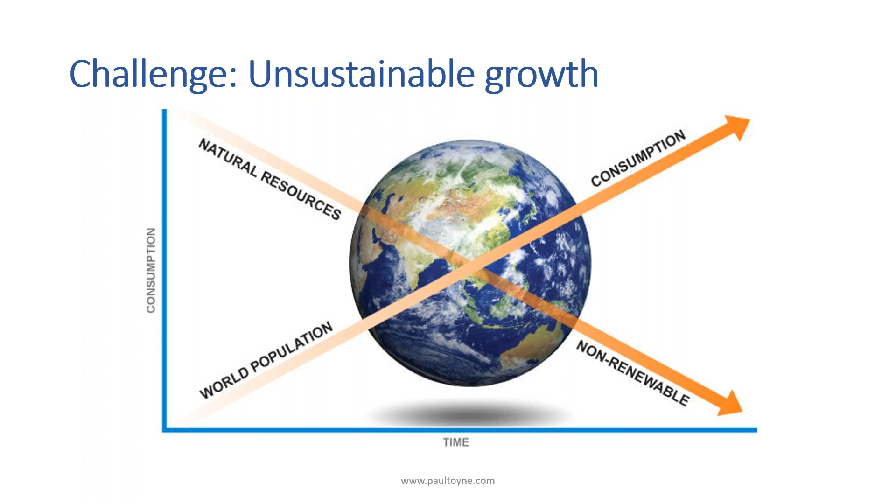I'll explain those different business models and then hand over to Julia. You've probably seen a slide like this before, and it really just puts into context what have we got: population growth, consumption increases, whilst finite resources reduce, and this creates problems.

It also creates opportunities. Most of you are built environment professionals, and you're well aware of this phenomenon of urbanization. It's not just happening in developing countries, but also in the UK, where we've got a growing population. We have to improve our infrastructure and increase housing, and we're creating new garden towns, for example. So we have to provide a new system to cope with these particular pressures.

When we look at population levels, we also have to understand how the biosphere has changed, and land use patterns and changes do affect the circular economy. I'll be referring back to that in a moment. But no surprises, you're probably all very familiar with the reduction of rainforests, the increase in desertification. All of these things are driven by our desire for consumption, which is stimulated by population growth.

If you're not aware of some of these publications, the first one I've got here is about biocapacity and our ecological footprint. People are now the major planetary force for change. If you just think about it, around 60 years ago, our global population was 3 billion. Look what it is now.

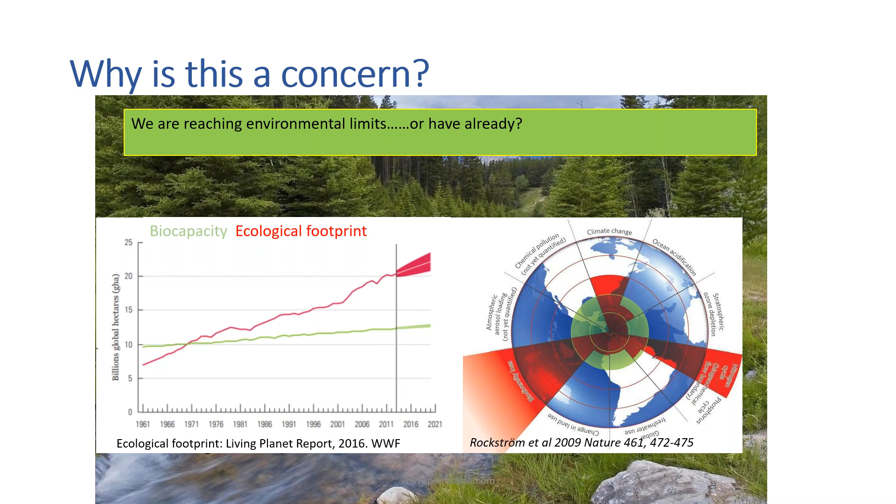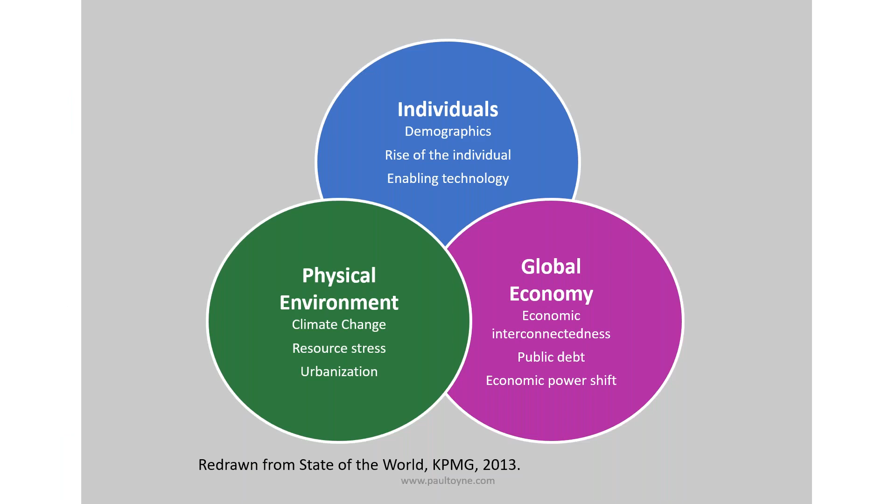So in summary, we've got an issue where we're going to need more environmental resources to satisfy the needs of more people. We need to distribute those environmental resources more equitably in a changing environment. We have land use changing. We've got the impacts of climate change. And indeed, when we start looking at these global drivers and trends, we see resource stress in the physical environment as being one particular challenge or driver that we've got to overcome.

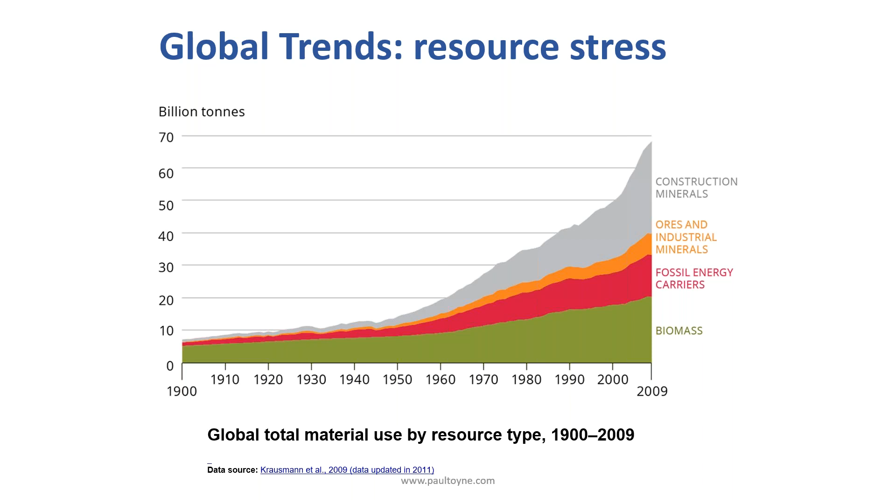And it affects construction. If you look at the data in this graph, no surprises, to satisfy developments, creating new towns, cities, building railways, airports, all the things that modern life involves, needs greater construction materials. So our use of construction materials is increasing. But we don't always have control over the supply chains of important materials relevant to us in the built environment.

Gallium, it's used in electronics for things like microwave circuits, for LED lighting, for diode lasers. Could we live in a world where suddenly there's no gallium for LED, when we're driving all these energy efficiency programs around LED, for example?

If you look at some of these other rare earth metals, they're incredibly important for technologies including advanced transportation, healthcare, scanners, and such like. So the point I'm making here is we've got resource use pressures, but we've also got very important materials that we've built up a need for in terms of providing solutions.

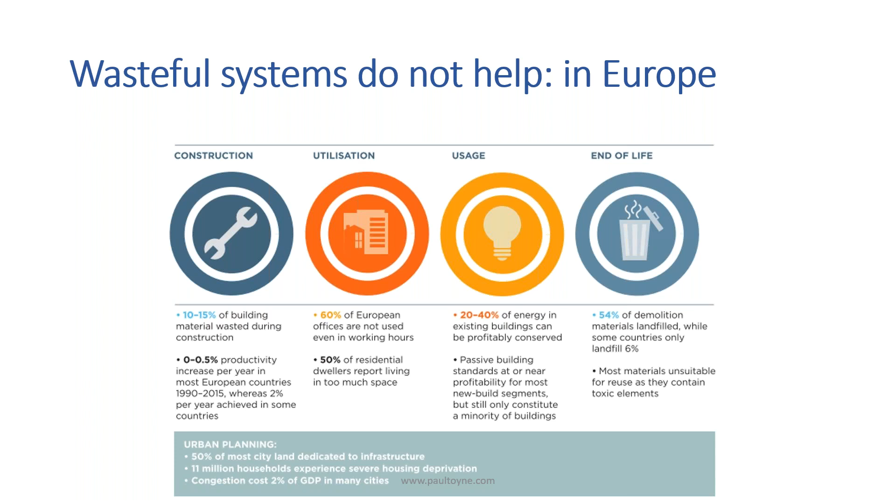Usage is around energy efficiency, and we've probably touched on that already. So there are opportunities within our system to improve how we design and build for the future, and how we think about disposal and end of life. So how do we transform what we've got?

The current system is described here, which is one of take, make, and dispose. We extract different materials, put them together, make something, then utilize it, but in that manufacture there's waste. And when we've utilized it, the consumers or clients, we typically waste it, we throw it away. It's not used again; we just go back and use virgin material to go through that cycle again.

And that cycle actually is a linear cycle. It's not circular at all. And that's the issue. So what does the circular economy attempt to do?

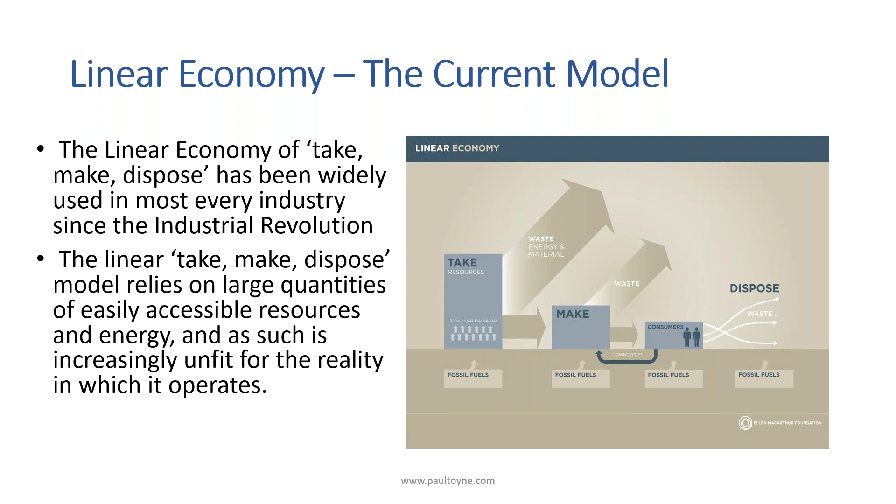So the circular economy is the principle, really: nothing is wasted. Everything can be reused, remanufactured, recycled, or put back into a productive cycle. The circular economy is meant to be restorative by design and aims to maximize and utilize the value of those materials at all times. That's quite an important point to make - you utilize and maximize the value at all times.

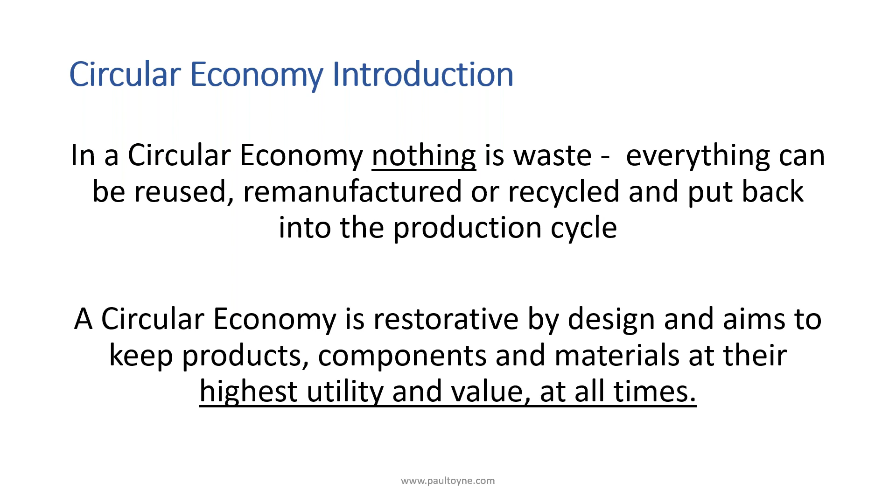You'll probably be aware of some examples where we attempt to keep materials in play, but we don't always maximize the value. So it's not necessarily the best use of those particular materials, but at least we're not completely wasting it and taking it to landfill.

That's the concept. A couple of other key points to think about: it's an economic model, and what it tries to do is decouple economic growth and development from the consumption of finite resources. In the same way we're trying to decouple climate change or greenhouse gas emissions from economic development, this plays a part in that larger equation.

It's also important to note it distinguishes between and separates technical and biological materials. In our presentation today, I think with Julia's examples, most of what we're going to be talking about is around the technical aspects rather than the biological.

It also focuses on effective design. When you look at it holistically, the way we design our systems and how we design for manufacture, for reuse, for disassembly, etc. - design is a fundamental principle that runs all the way through this.

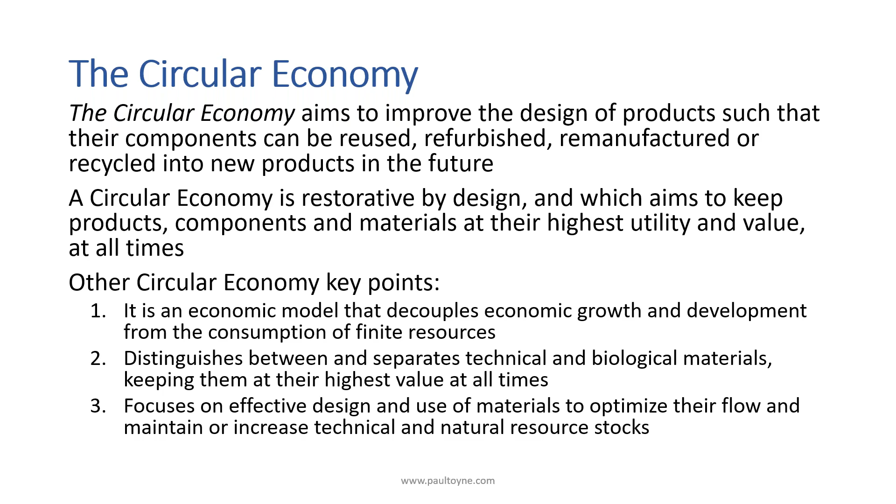So very simply, if we take a simple supply chain, maybe the production and pouring of concrete, we'd start with some basic ingredients, such as aggregates that come from a quarry, which have to be excavated. Those ingredients would then go to a product manufacturer. But before that, we have to make Portland cement, so we'd have a cement kiln including sand, silicas and various other things to make the Portland cement.

We'd then be in a situation where the cement provider or concrete pourer would be on site doing their mixes, which would include the sand, water, and cement powder, and then that goes into the finished product. And then typically, what would happen after that product has been used?

Well, the good news is in construction now, we typically would use that as a secondary material. So we'd crush that concrete and put it back into the system. So you've got a circular economy happening in the redistribution. It's not typical reuse, but you put it back into the system so it doesn't get wasted. That's what we're attempting to do. So all the way through, whether you're a parts manufacturer, product manufacturer, or retail service provider, can you get access to the materials to put it back into your system?

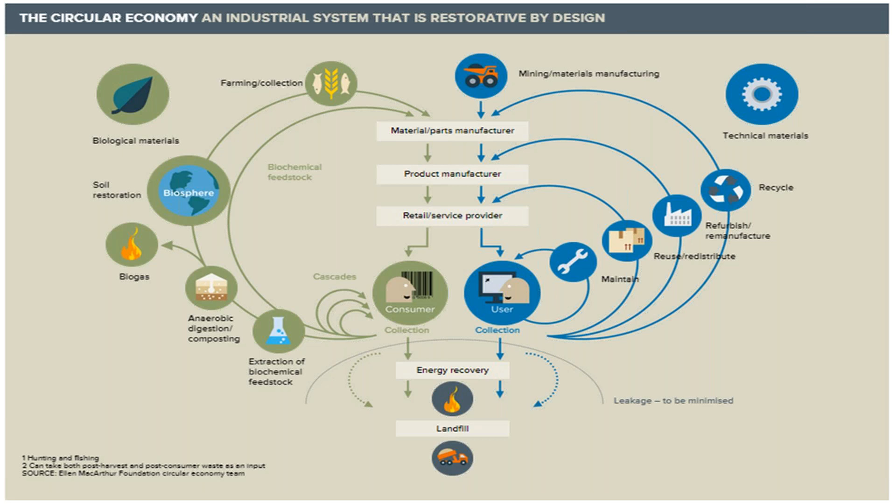And of course, when you're the user, you can go into repairing things. You don't have to then put it back into another system, you can keep it within your own system. We'll no doubt go through some examples of that. So that allows us to start thinking about, in construction, what are the opportunities for managing a system whereby we can incorporate those principles of the circular economy.

What I'd like to say is that in each of these stages, there are economic benefits. Remember, it's an economic model for how we can reconfigure and redesign our systems around materials. So if you think about it as a management process, wherever you are, whether you're refurbishing and remanufacturing, reusing or redistributing material, or extending and prolonging the life of a product...

So for example, instead of demolishing a bridge leading to a whole load of road traffic congestion, and then having to use those materials back into redistribution, you can actually prolong the life of some of these bridges. I remember when I worked for Balfour Beatty, there were particular polymers you could inject into bridges that would extend the product life, in other words, the life of that bridge for another 25, 30 years. So wherever you are in the system, you start to think about the economic benefits of deploying those principles and maximizing the value of that asset and those materials.

So very briefly, if we look at some of those benefits, just in the London environment, up until 2030, there's been an estimate, and the range varies quite a bit, but I'd take 2 billion, maybe up to 4 billion, in opportunities around value creation.

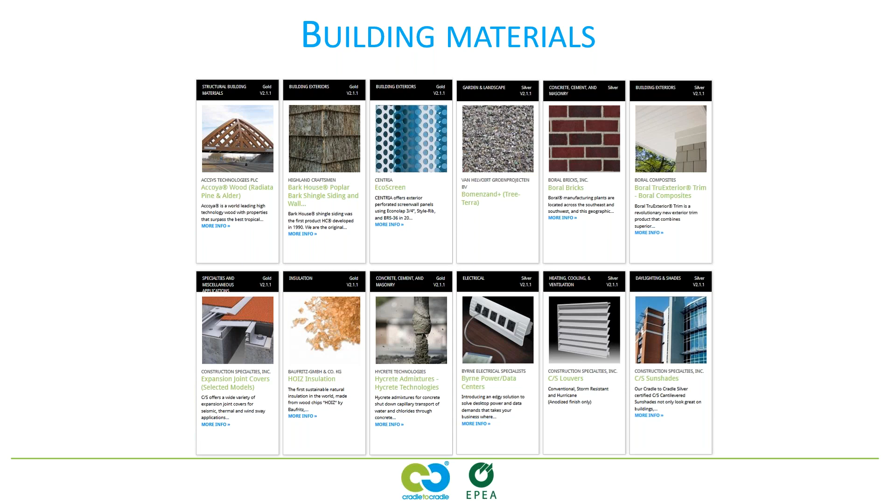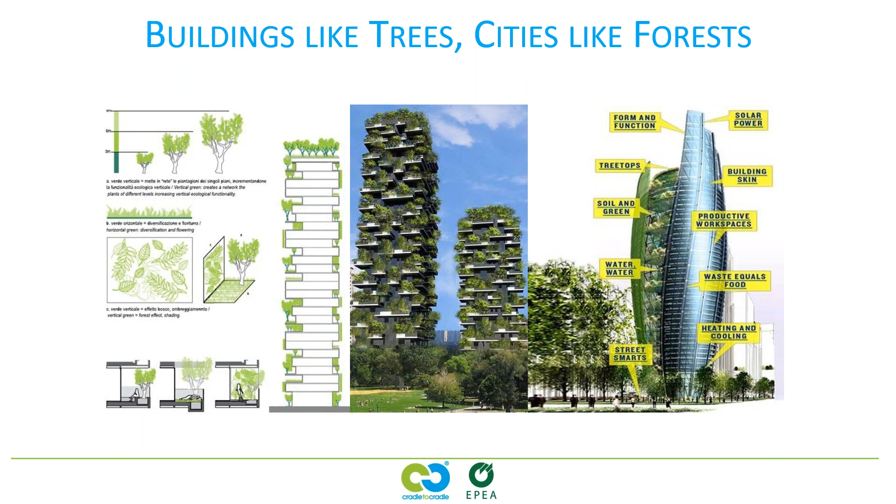And now we've got architects and designers also thinking about these principles of a circular economy, how we can improve the nutrient flow here, going back to that green part rather than just a technical aspect. Also how it then develops into the quality of life around clean water, beauty, aesthetics, having a positive impact. And here are all examples of cradle to cradle products being used mainly in Europe to deliver those principles.

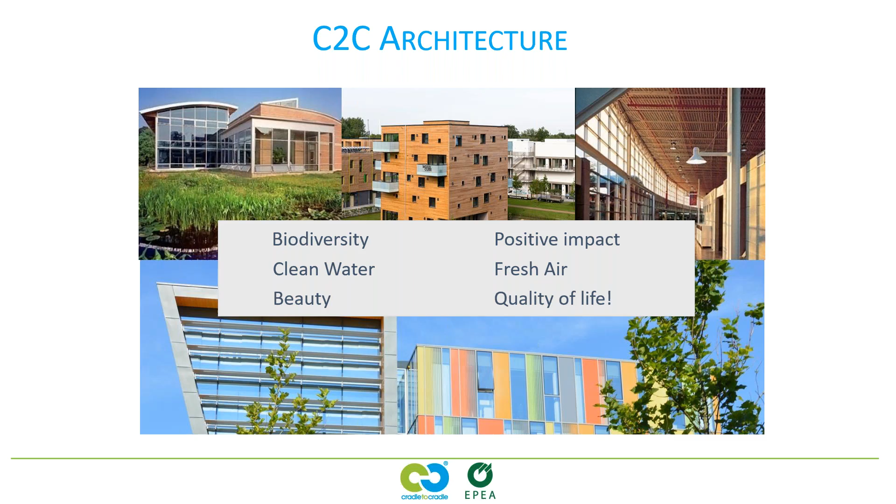And so I'm sure we're going to hear more examples from BAM. That just brings things to life around how these products have been, in their design, contributed and delivered to those principles. So there are a number of research programs if you want to find out more information.

For example, there's the Buildings as Material Banks. Here you can find out about materials passports, business models, and indeed BAM are part of that group.

So what I'd like to do now is just pass you over to Julia to provide more real life practical examples of what BAM Construct UK have been doing around the circular economy. Thank you.

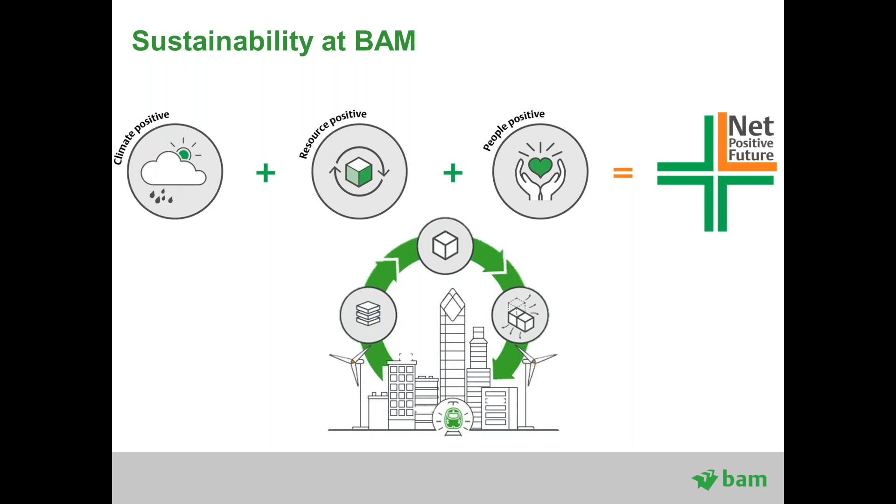So BAM have been members of the Circular Economy 100, which is run by the Ellen MacArthur Foundation. They have produced lots of great work around finding out the benefits around circular economy and where the opportunities are. And the C100 brings together lots of different companies, both from the built environment, so companies like Arup and Philips, but also companies from other businesses and industries, so Nike and lots of material manufacturers as well.

BAM joined back in 2013 now, so we've been working with them quite closely, and a lot of the work we've done since then has come from conversations and discussions from that group.

As Paul mentioned, we're also part of the BAMB EU research project. So this looks at various kind of issues around creating buildings as material banks, so including things like material passports, and it brings together 15 partners from 7 different European countries.

We've also been involved in consultancy work around the circular economy, so helping HS2 look for opportunities within the programme of works to implement circular economy principles, as well as working with the GLA, Greater London Authority, to help assist with the guidance for a circular economy statement as part of their draft London plan.

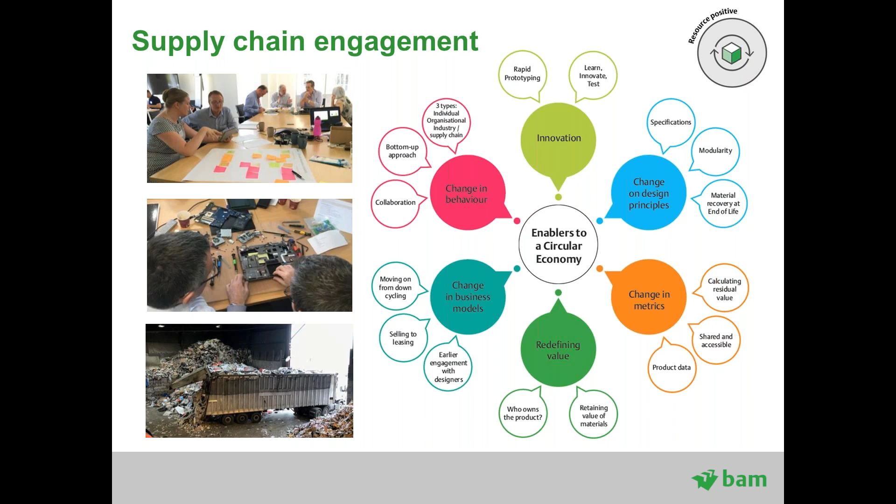But the example I'm going to bring up, which we've managed to achieve from those workshops, is Cheshire Police HQ. This is a project which was built by BAM back in 2003. It's a building of 23,000 square metres, accommodates over 1,000 personnel, with more than 50 types of department, including vehicle maintenance areas, training areas, and armed response units.

There is a big central open air courtyard with water features and social areas. There are 4 different wings, and extensive sports and recreational facilities, including a gymnasium, sports hall and restaurant. So it's a real mix of function, which means there are lots of different environments and functions which we need to accommodate in that building.

So we built that back in 2003, and we have an ongoing relationship with Cheshire Police, and BAM FM manage that building.

2003 is 15 years old now, and we recognised the lighting in there needed an upgrade. It's the old fluorescent tube ballast type of lighting. Some areas have changed function and have different uses now, and there was feedback that staff members were getting headaches, probably from the lighting and the change of function not being quite correct. So we decided that as we knew exactly where these lights had come from, we would go back to the supplier and see what was possible with this upgrade.

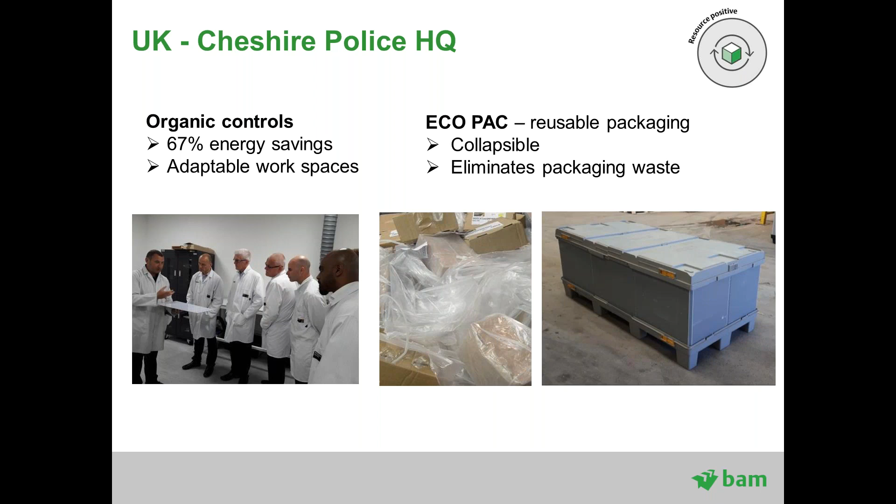Whitecroft agreed to take back 3 of the light fittings, took them apart, and decided to see how we could retrofit these old light fittings. We were pleasantly surprised when we realised that the new technology could be put into these old fittings - the brand new LED technology.

They could reuse the casing and also the flying leads, which is the wiring at the back of the lights, directly - no issues there. It was only the marshalling box, the control centre of the light, which couldn't be reused, due to the size of that box and the increased organic response needed.

We worked very closely with Cheshire Police HQ, Whitecroft, and Gibson and Ryan, the SME who are going to install and deinstall the light fittings, to identify areas of the building where it would be possible to reuse these retrofitted lights. What we found was around 200 to 250 lights which we could take back and retrofit.

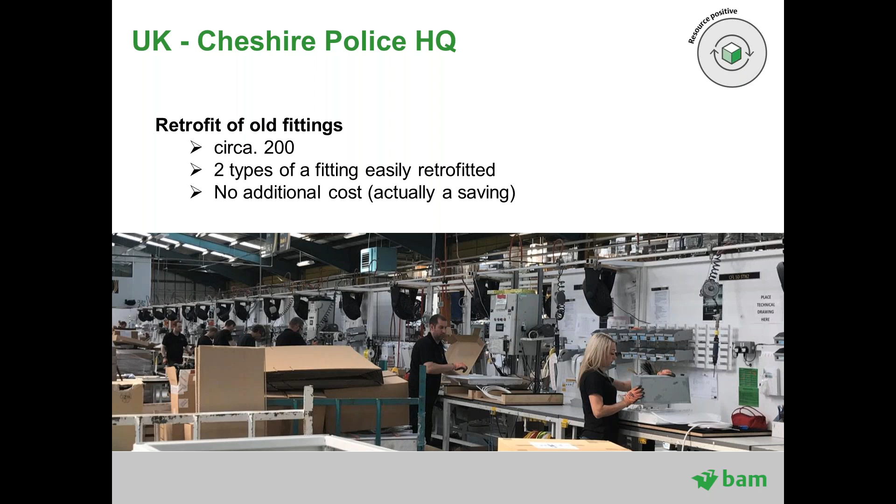The next example we're going to talk about is the circular pavilion. This was very much an experiment developed by Arup, Frener and Reifer, and the Built Environment Trust - a prototype to explore how the industry can work towards a zero waste future. It was about collaborative working and developing the concept of being transparent with what we can achieve around designing a building for circular economy.

The idea of this pavilion is that in theory, it can all be taken down and put up again elsewhere based on the design. To demonstrate what was done, I'm going to use Frank Duffy's 6 S's, which was later adapted by Stewart Brand, the architect. First of all, you have site - this is about the location of the building.

In this example, we were only there for 2 weeks, so the site was meant to be central London, where it could get a lot of publicity and also be accessible to people. But in terms of circular economy, you really need to think about your infrastructure and whether it is adaptable for increased function later down the line, and how it needs to be adapted if there's a change of function in the future.

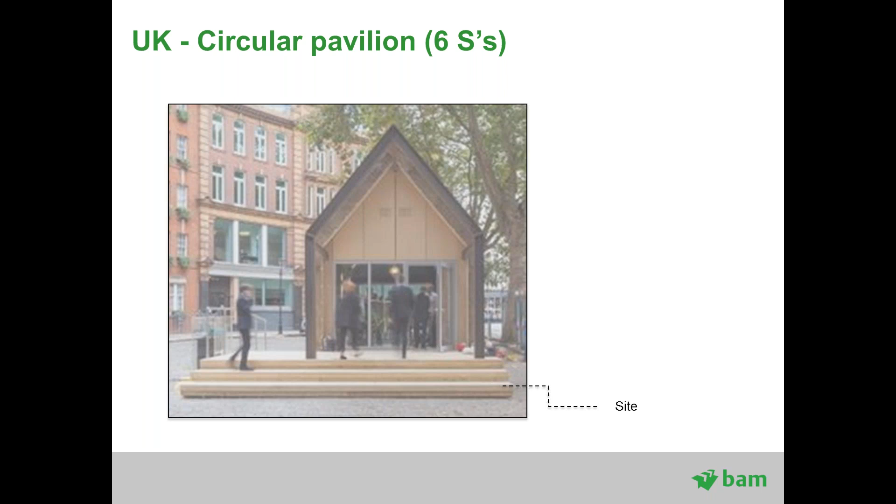Next up, you have the structure. For the circular building, this was designed to be demountable and reusable. The steel work was made from offcuts from another project - the size of the building was adjusted slightly to suit the size of those offcuts. The steel work is all bolted together, so there's no welding, meaning we could take it apart and put it together again at a later date.

The skin of the project is generally on a 15 to 60 year cycle, and it has a functional purpose of protecting the structure, but also an aesthetic value. What we used here was cradle-to-cradle certified cladding, timber rain screen cladding, which Paul mentioned earlier about cradle-to-cradle.

The roof lights can be removed in one piece and in theory resold as new units. There shouldn't be any change to them from being within the building. The glazing was uncoated glass, which improves its recyclability. Both the roof waterproofing layer and the curtain walling system use no adhesives or site-applied sealants, again facilitating deconstruction at the end of the building's life.

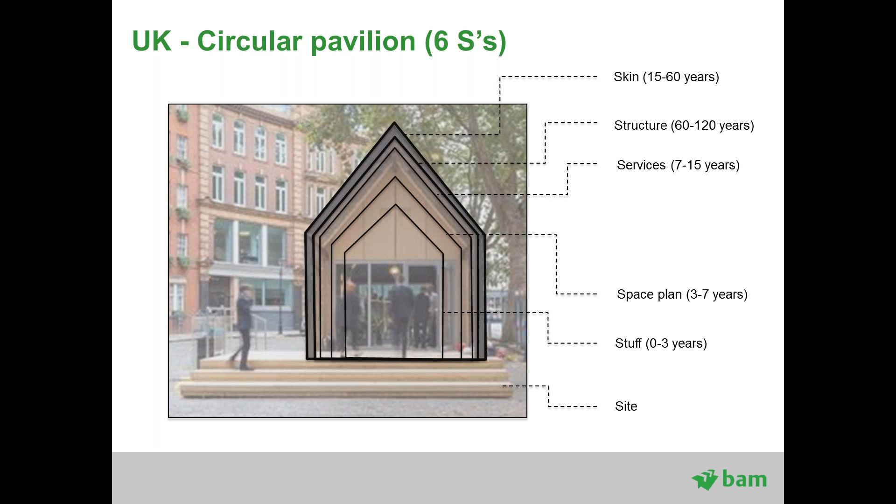And finally, the stuff. This is the things you find in a building which will change quite frequently - so it's the furniture, appliances and personal items all fall into this category. And on this next slide, there's a few examples of what we did around that.

So with the stuff, there's things like the task chair from Orange Box, where components can be easily replaced or repaired and upcycled at the end of life. So in theory if the handle of the chair goes, instead of replacing the whole chair, you can just replace the handle.

Other examples of things which went in were the Gator duct cardboard ductwork instead of metal ductwork, which is quite a lot more carbon intensive. There is the Autex wall finishing, which is made from recycled plastic and itself is totally recyclable as well. And finally, also the cradle-to-cradle loose lay floor tiles.

So a real mix. And there is a website which Arup have produced, which goes into a lot more detail about what went into the building if you're interested in finding out a bit more.

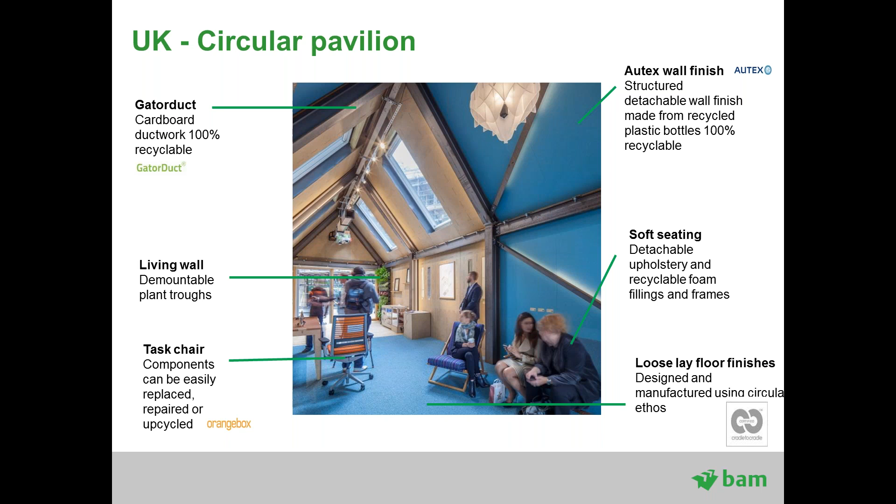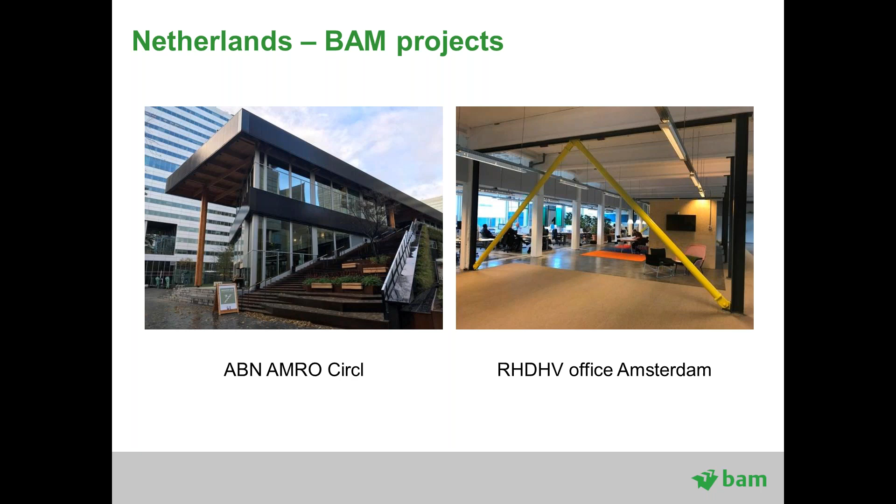Just check how long is the time. I'll just briefly go into two of our Dutch projects, which again have a circular economy ethos at their heart.

So the first one is the Circl Pavilion, which was built for ABN AMRO, the bank. Originally, when this project was put forward, it didn't have a circular economy design, but once BAM were appointed, we put the concept forward to the architect, who really bought into it as soon as we had those discussions with them.

And ABN AMRO now have a very strong commitment and interest in seeing the life cycle value of those materials within that building.

The design is modular. Lots of prefabrication was used, and the idea was again to make sure that the demountability was available at the end of life, and they reused materials wherever possible. So they looked at using urban mining specialist New Horizon, who were able to source different reused materials from other projects as well.

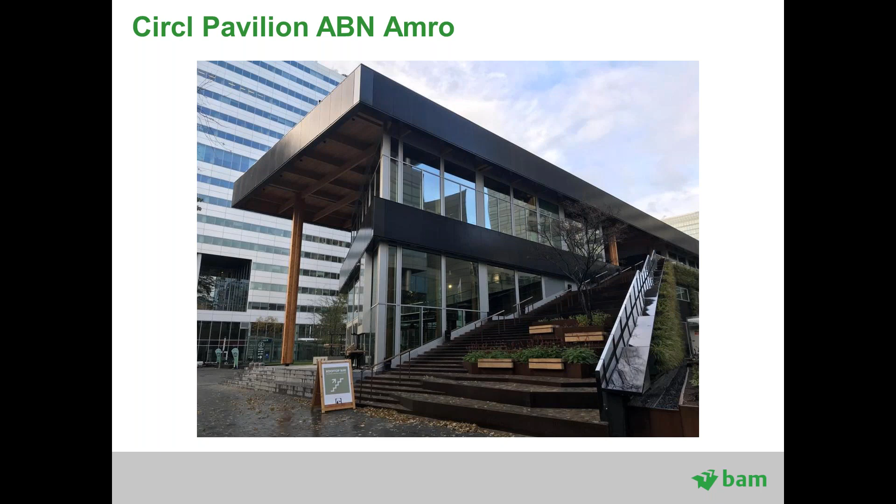There was early contractor engagement with the supply chain to make sure that we could incorporate supplier take-back and buy-back contracts, as well as talking about residual value during those early discussions.

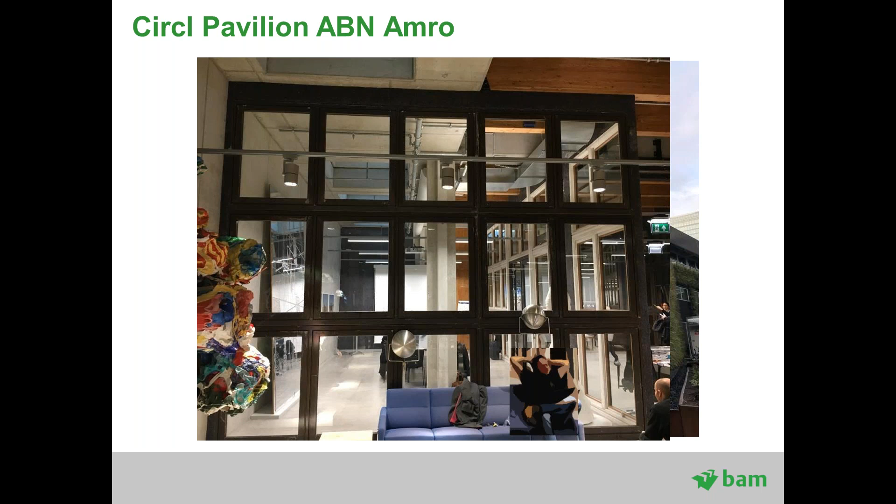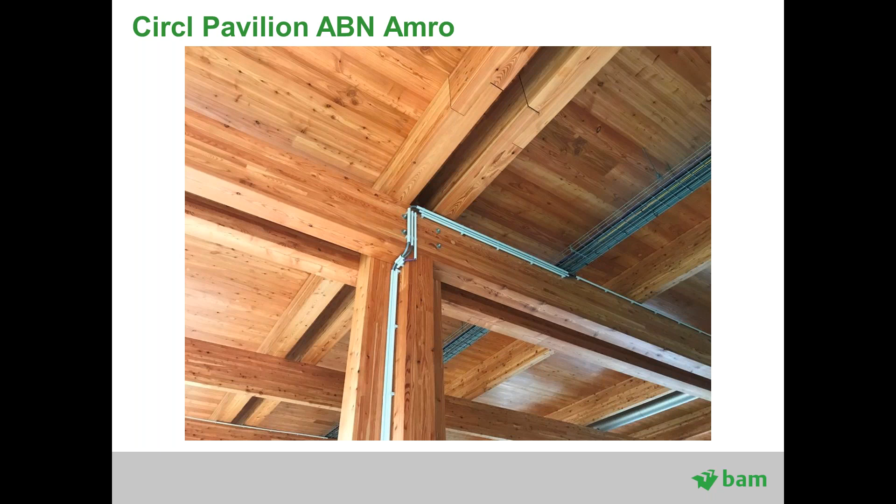When this was put together, the design of that timber was based on no nails being used, but all screws, and we thought about how to put it together to minimize the amount of screws as well. You can also see on that image the cable ductwork, which was salvaged from another property and brought to this site for reuse rather than going for recycling.

Within the space itself, there are movable partitions to make the space really flexible and to reduce the amount of time it's not being used. So the idea is that in theory it could be a pop-up cinema one night, and the next day it could be a pop-up shop in another space, with these movable partitions changing the way the space is laid out.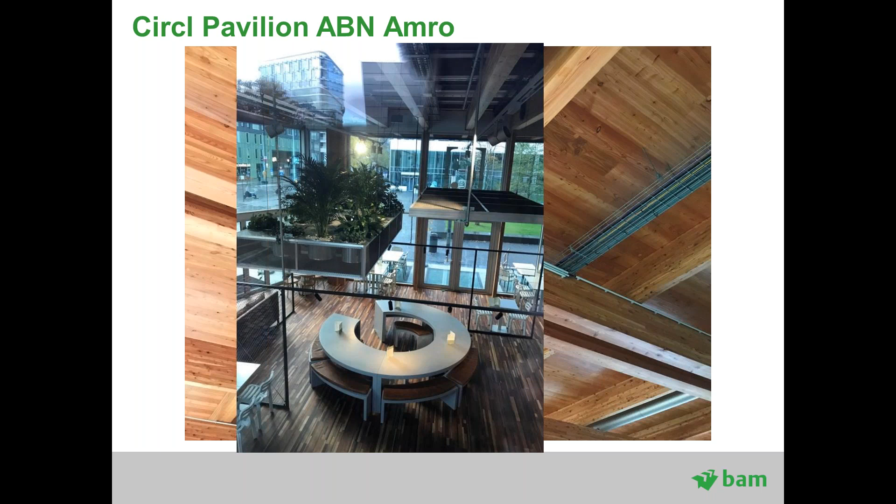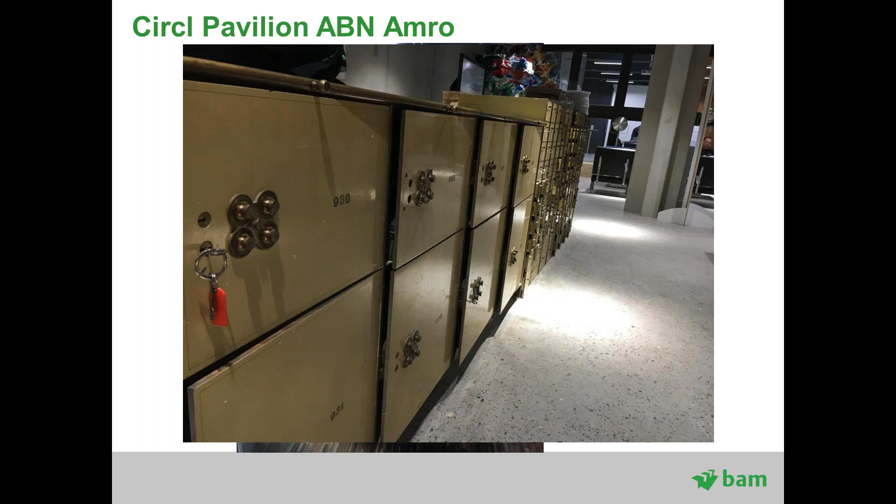They also incorporated other parts of the bank and tried to keep some of that feeling and place of the bank by reincorporating items from there, including the lockers, the old lockers from the building.

And then externally, they tried to reuse lots of renewables. In this case, there were high efficiency solar panels from the Netherlands, which had a guaranteed longer lifespan and were set on the roof. These are the wall panels, but there were some on the roof as well, set on recycled paving stones and ballast which were on the building's site at the start.

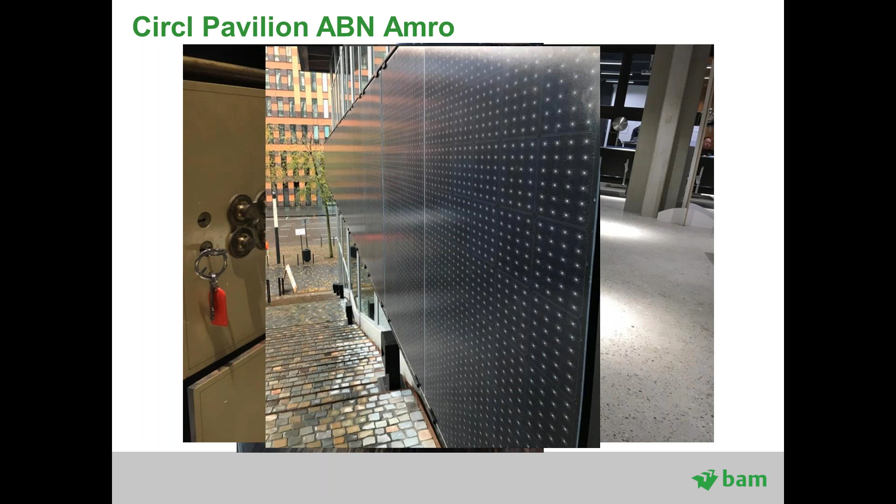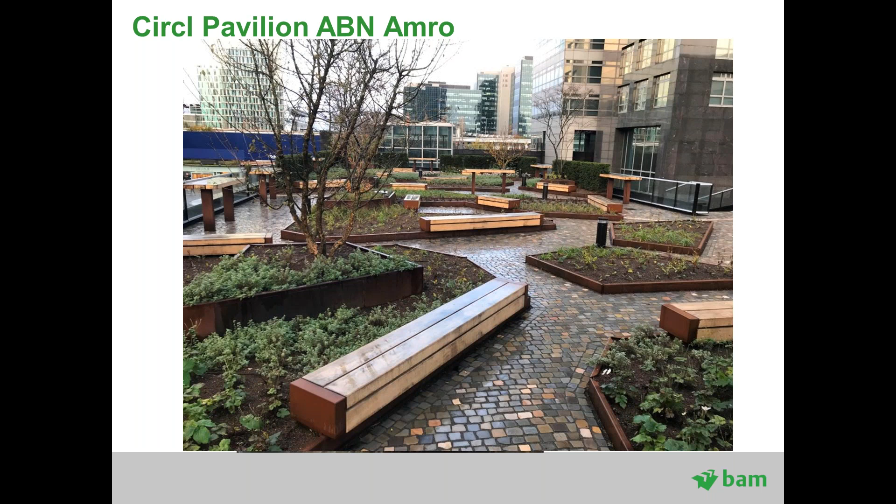And then on the top, there are herbs which are grown and sold and used in the restaurant. The demountable facade is made of recycled aluminium, and both the green wall and the planters on the building can be detached and reused again at the end of life.

I'll go through this one very quickly. This is the transformation of Broedplaats, for Royal Haskoning, and it was an old car showroom building, which you can see there in the image. The idea was to create a flexible office space, some of which was for Royal Haskoning themselves, but then there was meant to be a lot of community desk space which could be used by different local community projects.

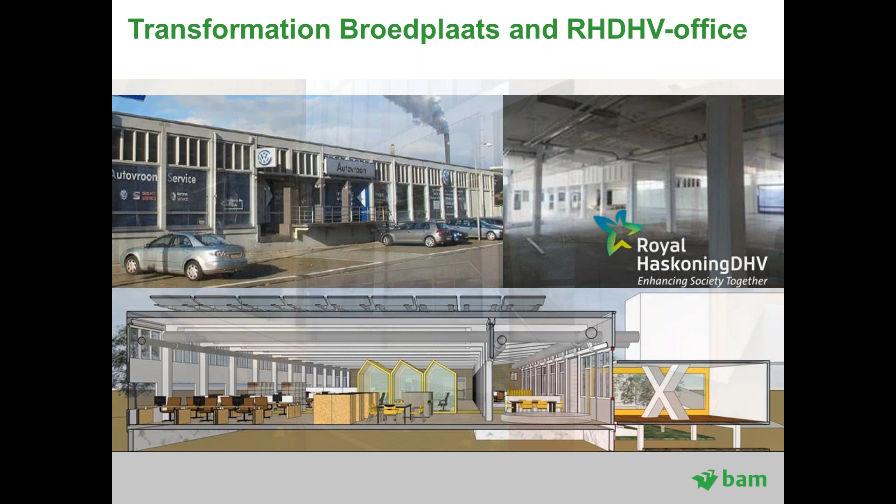So what they did was partner with New Horizon again to reclaim valuable materials and fit the building out. That included the ductwork I talked about earlier. There was an investor-led approach for this, focusing on residual value at the end of the building's life and using it as a catalyst for creating that circular building idea.

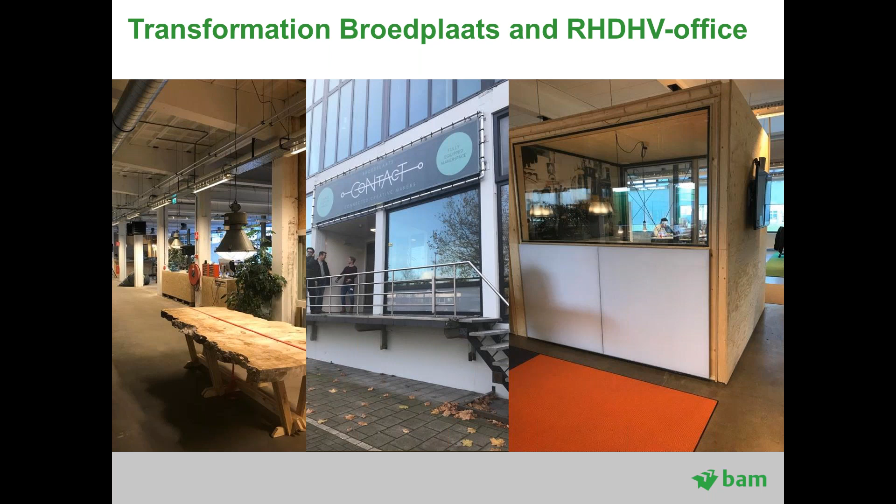The idea is that there are fixed rates paid over a period of 10 years. At the end of that time, the materials can either be reused or the lease can be renewed and continued. So that's it from me, a few examples of what we've been doing at BAM, but I'll pass back over to Will to go to the next section.